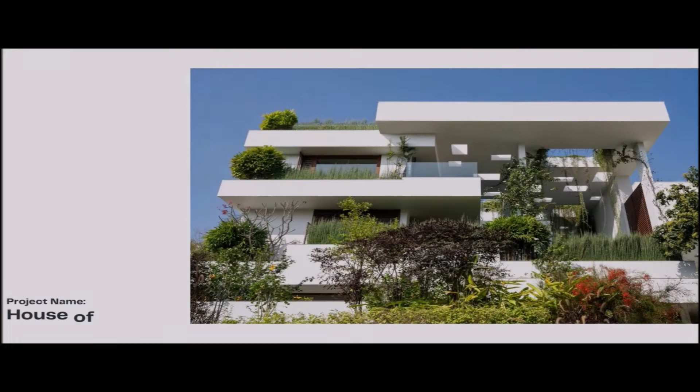Our project name is House of Terraces. Architects: Architecture Paradigm. Area: 10,000 square feet. Photographs: Anand Jaju. City: Bengaluru.

Country, India. The site for the house is situated in a gated community about 20 kilometers from the main city center in Bangalore. Situated on a small hillock, the approach to the site begins with a climb towards the west. A winding road leads to the site, which is bounded on the east by this access road and neighboring properties.

Around on the three sides, the land starts dipping starkly beyond this eastern road, thus affording panoramic views from the site towards the city.

The other key aspect that informed the design was the site's overgrown wild vegetation during the initial inspection. It had remained untouched for a few years, and the surreal presence of this very dense, dark, and overwhelming wild growth amidst neat houses around greeted us during the first visit.

The design for the house rested on 5 principles: views, vegetation, layering, terraces, and interconnection of inside and outside. The built form is an arrangement of stacked volumes informed by the Vastu principles. Here at each of the levels, the programmatic spaces are flanked by decks, courts, or gardens.

The living, dining, bedrooms, and family spaces all open to either a court or a terrace, directly promoting an easy inside-outside relationship. Terraces become informal family spaces for gathering, encouraging an indoor-outdoor living experience enhanced by the salubrious climate that Bangalore offers.

The design is sectionally modulated, wherein the upper terraces are linked with the lower-level gardens, leading to the formation of cascading terraces. This could also be read as the idea of the ground climbing up to the terrace levels.

Both of these terraces are capped by a parasol punctuated with openings breaking the Indian sun into shadow. These openings serve as frames capturing the sky and the cascading creepers within them, continuing this theme of built-in elements of landscape interlocking with each other.

The horizontal layering is part of the strategy to extend the indoors to the outside towards the horizon and have vegetation engage in this space.

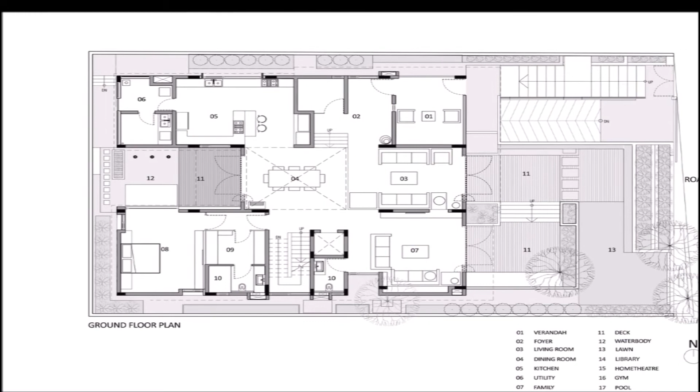For the house inhabitant, the foreground, middle ground, and the distant background horizon have a simultaneity of landscape layers that connects the house to the city. Much like the sfumato technique in painting, vegetation softens the gaze, extending from near to far and beyond.

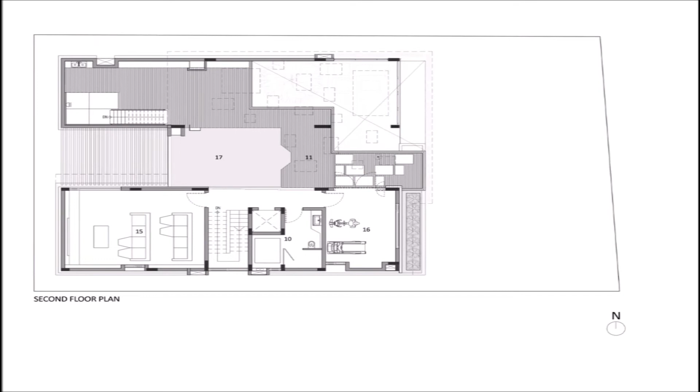Looking from the city towards the house, large subtracted volumes address the scale and the grandeur of the open horizon. The layering strategy also was used to mitigate the largeness of houses sitting 2.5 meters above the road.

The overall volume is broken down to form a cascade of platforms that gently rises from the ground up to the roof. Vegetation grows freely on these cascading terraces, thus enlivening the narrative of a house with a bounded garden, keeping the promise of the initial encounter of the site alive.